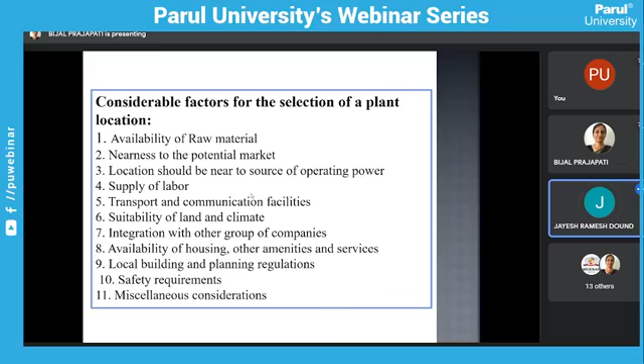Third, the location should be near to the source of operating power, supply of labor, transport and communication facilities, suitability of the land and climate, integration with the other group of companies, availability of housing and other amenities and services. These are the points which make the hierarchy for GMP for good pharmaceutical management as well as production planning. Okay. For the next slide, plant layout.

Once the decision about the location of the plant has been taken, the next important problem before the management is to plan the suitable layout for the plant. So plant layout is the method of allocating the machines and equipment, various production processes and other necessary services that are involved in the formation process of the product within the available space of the factory.

So production planning layout is mainly done in such a way that step by step we have to follow the individual steps. For example, starting from the raw material, the next step is receiving of the material, then sending of the material, then the warehouse. So these are layout diagrams in which a pictorial explanation can be given in an easy way. After receiving the raw material, it goes to the warehouse. From the warehouse, there are two components: the drug components and the packing materials.

Once the drug and packing material have been received, quality control inspections are done to decide whether the components and packing materials are to be rejected or kept. They are analyzed. After analysis, the rejects will be thrown out and the good ones will be kept. Weighing and dispensing will be the next step. After approval of the material, the manufacturing process will start.

Then in-process storage, and after in-process storage there will be quality inspections. After inspection, compliance will be given and the packing and labeling of the product will be done. So it indicates the path from the raw material at the starting source till the finished product, that is the packing. Once packing is completed, it goes to quarantine. Quarantine means a storage where the drug is kept in suitable environmental and climatic conditions. Then it has to be released based on the production storage, and afterwards is the shipment.

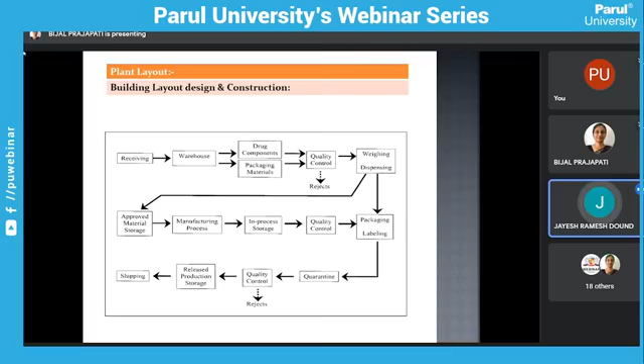Yes, this completed. Next slide. Now in this type, there are a number of facilities. So let me come to the point: what are the main equipment and facilities that are required for the plant layout?

Mainly we will explain the HVAC system. It is very important because it gives information for airflow distribution, control, filtration, air recirculation, and supply of sufficient airflow volume to support the cleanliness rating of the room, introducing air in a manner to prevent stagnant areas where particles could accumulate. As we know from a degree or postgraduate course, we learn about the different classes of HVAC systems.

This depends upon the different class of area. For dispensing and weighing, there is a 100 class where air can be circulated to prevent suffocation-like activity during dusting of raw materials. For this reason, HVAC systems suck the air and give pollution-free air for the labor or compounding system. These are the main things for the HVAC system.

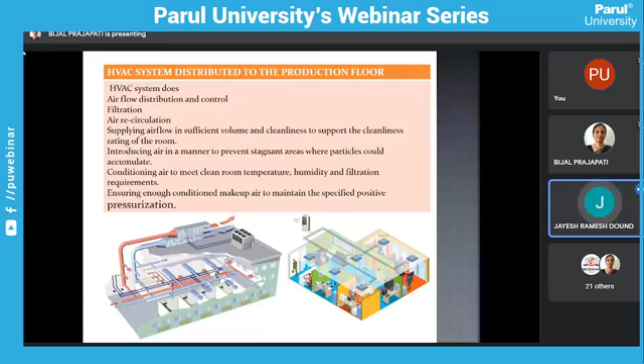Whatever the finished products are, they should be suitably designed and constructed to facilitate good sanitation. Now we will go to the next slide, which includes the ETP. ETP is nothing but the effluent treatment plant.

Whatever waste is generated from the initiation of raw materials and during manufacturing operations, the waste rejections are to be collected in a separate area where we can treat all this wastage to make a slurry sludge, and heat it at a high temperature of more than 800 degrees Celsius to convert the sludge digestion into powder. This helps prevent microbial or environmental contamination. For this reason, an ETP plant is a must and should be part of the plant layout.

ETP plants are used widely in the pharmaceutical industry to remove effluents from bulk drugs. During the manufacturing process of drugs, various effluents and contaminants are produced, so effluent treatment plants are used to remove high amounts of organics, debris, dirt, grit, pollution, toxic and non-toxic materials, polymers, etc. from the drugs and other medicated stuff.

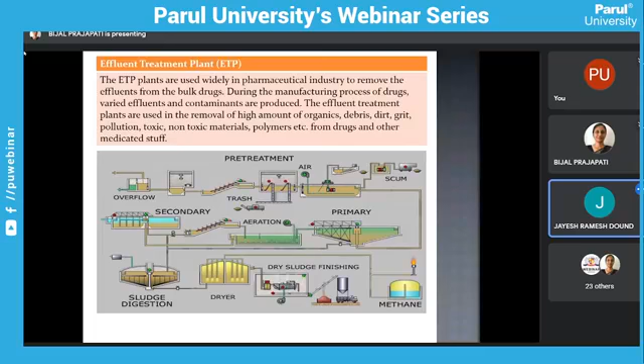So this is the ETP, which is the main source of plant layout. Now we will go to the departments in pharmaceutical industries. After having different types of layouts finalized, we will go section-wise through the pharmaceutical development industry to see what kinds of departments exist at different stages.

The first one is the central warehouse. In simple words, the central warehouse is nothing but a storage room. This is further divided into two types: raw material warehouse and finished goods warehouse. The raw material warehouse mainly includes active ingredients, that is the API, next the excipients, and third the packaging materials.

The next is the finished goods warehouse, which is generally nearer to the outlet of the company for easy and efficient transportation. Once the drug has been converted into dosage form, it is kept in the finished goods warehouse in a quarantine area, nearer to the outlet where dispatch of the material takes place.

Now we will go for the production department. In the production department, there will be a number of departments. First one, we will go for the liquid department. There are three types of liquid preparations: solution, suspension, and emulsion.

For solutions, the equipment mainly includes dispensing booth, preparation and manufacturing tank that is SS steam jacketed, storage tank, bottle washer, filter press, filling machine, capping of the bottle, and bottle labeler, that is automatic, semi-automatic or manual, and finally the carton machine for packing into drug products.

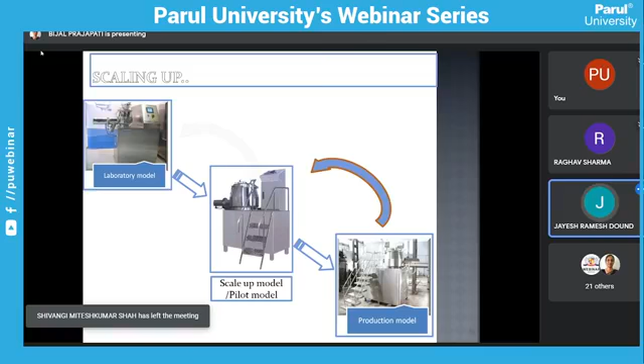So for that, we will go step by step. What is the pharmaceutical product development? First we will go for the design of experiment, that is the initiation of the project.

In that we can define the factors, that is CMA and CPP. CMA is nothing but the excipient, the raw material starting initial, that is the critical material attributes, and what will be impacted is the critical process parameter, that is CPP. So we will do a risk analysis of both, and on that we will select the proper experiment design which will affect the factors, that is the critical process parameter.

Now coming to the major responses, that is the CQA. I will explain the function of CMA, CPP and CQA. CMA is nothing but the critical material attributes, the starting material of the excipients which will impact my process, that is the procedure, and whatever the final products coming, that is the CQA, the critical quality attributes.

These are the factors to be considered during the initiation of product development, and the design of experiments to be run in experimental runs. Analysis factors include the response relationships. First will be the model graphs, in which we can apply numerical factors and graphical analysis.

Then we will decide the range, on what range the product should be coming. Range is nothing but giving a proper range which indicates that the process will be feasible, and it will indicate that critical capability factor.

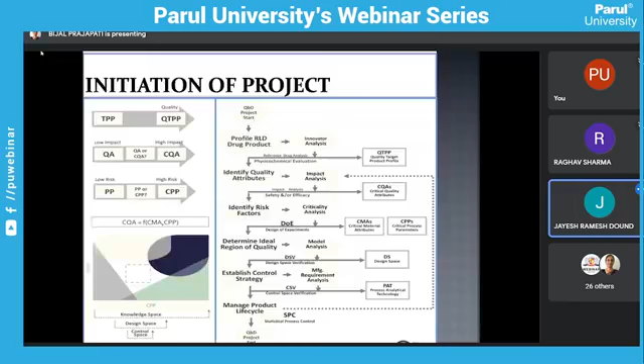Now, from a technology point of view, I would like to introduce the contents I am going to explain regarding the RMG, the rapid mixer granulator. Second will be the FBD, the fluidized bed dryer and processor. Multi-mill, Quadro Co-mill, roll compactor, blender, compression machine, and autocoater. These are the contents which will be highlighted, along with some parameters from the engineering point of view, on how the scale-up activity has been done prior to going for commercialization.

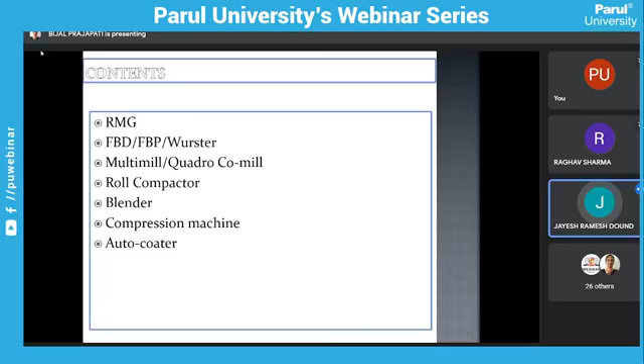So first we will go for the RMG, that is the high shear granulation. You can see the pictorial representation. On the left side in green is the CMA, and the right side is the CPP. So what will be the CMA?

That is the critical material attributes. So whatever the ingredients which are being used for the development of the product, that is diluent, okay, binder. So these are the intragranular material. So for that we have to decide what kind of binder concentration we are going to prepare. What is the granulation solution agent, that the concentration of solution to be added.

Second one is the API diluent ratio. How much concentration of the API that is present in the formula. And we should know what is the API PSD, particle size distribution. What is BD, that is the bulk density and tap density. So why we are highlighting the PSD, BD and TD? Because these are the three factors which will be useful for calculation of the RMG capacity.

Why are we highlighting capacity so much? Because once the capacity has been identified, we can manufacture the drug substances into the drug product. So why we are using binder concentration, granulating agent, API diluent ratio? These are the factors which will be impacting the critical process parameter.

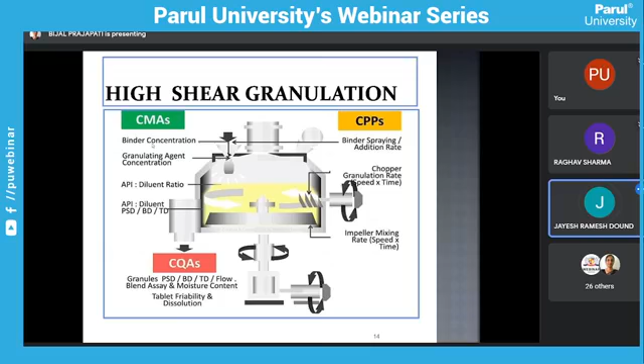Coming to the next slide, FBD, that is the fluid bed granulation. Here also I am highlighting the CMA, CPP and CQA. So fluidized bed granulation is the next step of RMG. Once the wet mass is developed in RMG, we will go for the drying. So drying includes how much air volume is required to fluidize the wet mass.

Okay, so as you can see, the API binder polymer concentrations. Now in fluidized bed granulation, there are two types of granulation that can be done. One is the drying of the wet mass and second one is the top spray. So I have highlighted the API binder polymer concentration in a top spray manner. If the concentration of API and binder polymer is high, the viscosity will be high and the wet mass will become overloaded. So the wet mass cannot be fluidized due to the choking of the dish mesh. So depending upon the CMA, this will impact my CPP.

That CPP is nothing but whatever temperature I require, that is the outlet temperature, inlet temperature, filter bag pore size. You may be unaware of filter bag pore size, because filter bags are the bags which are inverted on the upper side and which are shaken to release the materials and to prevent the clogging of the filter bag pores. So that's why we need to shake the filter bag during the operation.

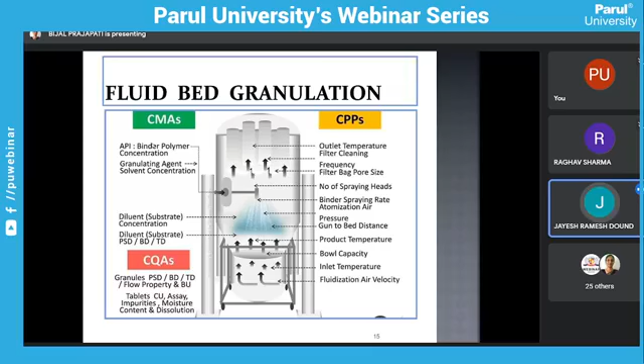So this is the engineering point of view where we have to work for fluidized bed granulation by doing the calculations. Okay. Coming to the next slide, the tableting process.

So the first one is the RMG, the second one is the fluidized bed, where wet mass is converted into granules. Once granule formation has been done, I have skipped one thing, that is blending. Blending has a CMA, and the CPP is the blending time and the RPM. I have skipped it, but the main thing is the tableting process, so I will explain the tableting process. The CMA and CPP are correlated.

The particle size which has to be controlled during fluidization in the FBD will have an impact on the tableting machines. So I will explain what CMAs are to be considered during tablet formulation using the machines. First, the particle and granule size, that is the distribution, shape, and size. Second one is the fines ratio. Once the tablet blend has been completed, a ratio has been finalized during scale-up development. Fines and oversized granules should be in a ratio of 60% fines to 40% granular material. Why has the ratio been decided as 60 to 40?

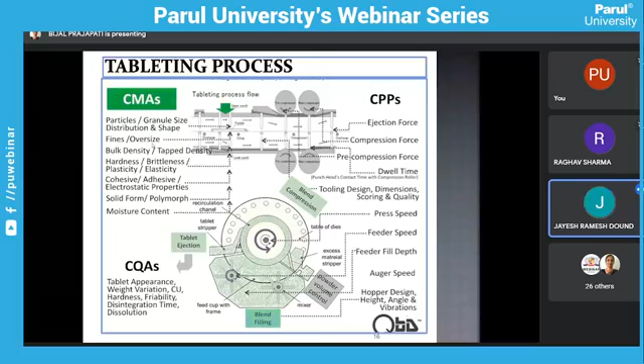We can say that we are used to the word rat holing formation. Technically rat hole formation is a very worst case because it will impact my CU, average weight, hardness, DT and all the things for the future purpose. For that reason, hopper design is also a part of the CPP. Okay, next one we will go for the encapsulation. Next slide.

Yes. For that also we have the CMAs and CPPs. So for the overall capsule formation, from a practical point of view, we can elaborate how the capsules are coming. They are getting separated; the cap and body have been separated. Once the capsules have been separated, they will come to the blend where slug formation will take place, depending upon the different tamping pins. So five types of pins will be there.

So one by one the slug will be formed in a different way, and once the weight has been selected, the slug will come into the capsule, and the next step will be the ejection, means closing of the caps and the body, and final will be of the faulty ones. So this is the encapsulation process. Now we will include the CMA. In the CMA, the shell material, empty caps and body dimension.

Yes, it is also a very important part because the dimension and the capsule body shape have to come in line with the channels. Once the channels are appropriate with the size and shape, there is a free flowing movement. If the dimension is different, there will be choking and it will impact the further process. Next one is the gelatin bloom strength. The capsule should have bloom strength, means what? It should have a suitable strength to withstand the ejection force or the vacuum which is used during the separation process.

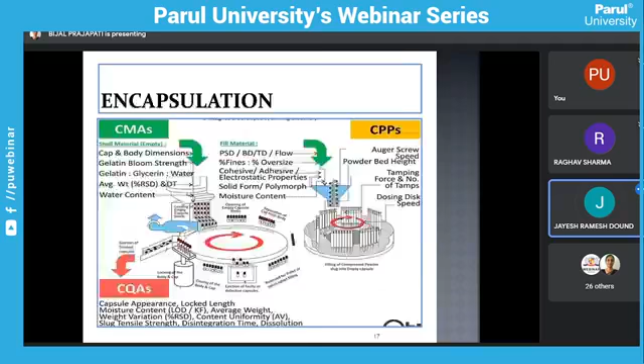Now we will go to the next slide, that is the roll compactor. So roll compactors: in R&D scale-up and commercial scale-up we use the roll compactor for drug substances which are very sensitive to moisture or to organic solvents. For those reasons, we avoid wet granulation or drying for that API, and go for the roll compactor, where the flow property can be enhanced by applying pressure to the API as well as the excipients to form proper granules.

For that, the CMA is the API-excipient ratio. For API and excipients, again the same things: PSD, BD, TD, flow properties, API particle size, and polymorphism. Why are we saying polymorphs? Because for most molecules, when they come under the compression force of the rollers, there might be a polymorphic change. So for that reason, we have to first go for the CMAs, and the last one is the dry binder and lubricant concentration. These are the CMAs which impact my CPPs.

So CPPs. I will explain what the roll compactor machine is and the machinery and terminologies. The first one is the agitator. The agitator speed is used for the movement of the material from one end to another. The second one is the feeder. Feeder means moving a particular volume of the blend forward. Proper feeding and proper agitation should be there, so they are proportionally constant, equivalent or proportional to each other.

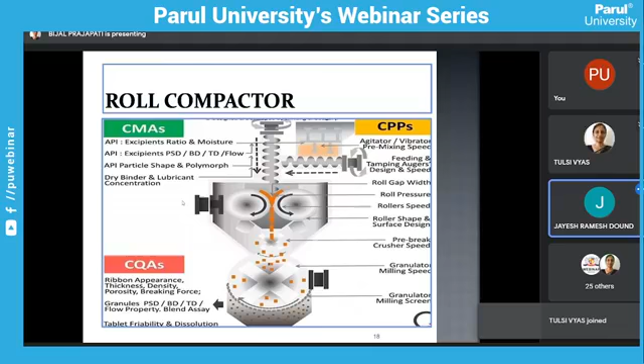Now we will go for the kinematic similarity. Two geometrically similar systems are called kinematically similar if they have the same ratio of velocity. Same velocity, that is kinematic similarity. Same geometrical shape, geometrical similarity. Now dynamic similarity: they are said to be dynamically similar when they have the same ratio of the forces. So geometric, kinematic for velocity, and dynamic for forces. These terminologies are very useful for the scale up basics for RMG, FBD, blender, and tableting force.

So why forces? We can correlate now. For dynamic forces, in the tableting process, compression force is there. Why velocity? In FBD, there is air velocity. The volume of air is required to fluidize the blend of higher weight mass. For that reason, kinematic similarity is required. Geometric similarity means same cylindrical shape, like the RMG. RMGs have different sizes, but the height to diameter of impeller and the diameter of the RMG will correlate. So that is why we need the scale up basics. Coming to the next slide.

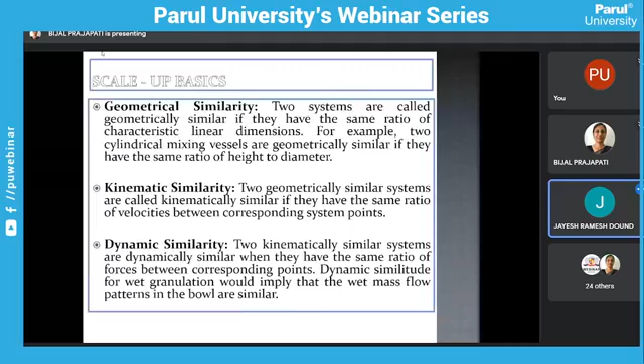So overall, what are the factors to be considered based on the occupancy of the equipment? We have RMG, mill, Comil, blender, fluidized bed dryer, compression machine, auto coater, and roll compactor. All this I have highlighted for the CPP and CMA. Before going for the selection of occupancy and equipment, we have to consider some factors. For RMG, we have to calculate the fill ratio, impeller tip speed, and Newton power number for the torque. I will explain one by one in the coming slides.

For the blender, Froude number, number of rotations, and headspace calculation. For fluidized bed dryer, base plate area ratio and occupancy. For compression machine, dwell time. For auto coater, brim volume for occupancy, pan load, and Froude number for the pan speed. And for roll compaction, roller gap and roller forces. These are the factors to be considered during selection of equipment for in-process as well as finished products. Coming to the next slide, RMG.

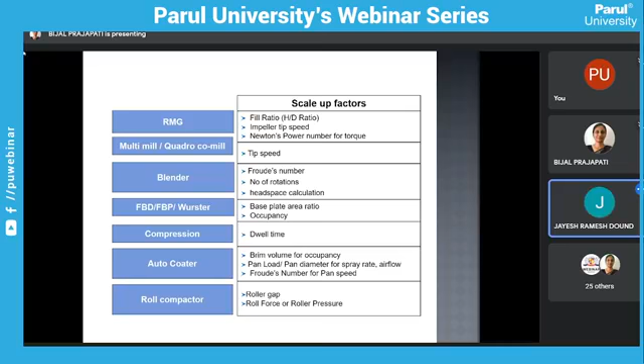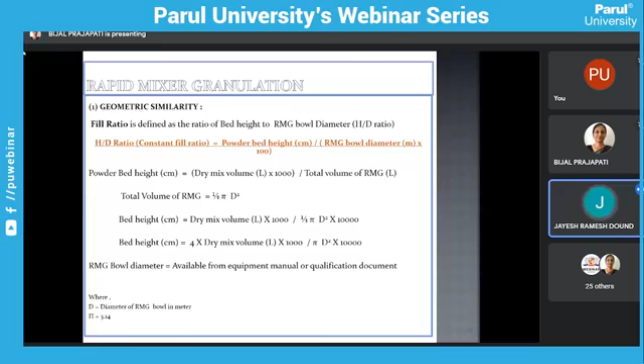I will just explain in short, because it will help you understand, but it will not be implemented from your side. Fill ratio is nothing but the ratio of the bed height to the RMG bowl diameter. The height and the bowl diameter give the fill ratio. We use this fill ratio to check the occupancy of the RMG, to have the capacity to withstand that blend. Coming to the next slide, we will go for the kinematic similarity.

RMG can be scaled down or scaled up according to the tip speed. Why is tip speed required? Because in R&D, small scale units are there: 5, 10, 20, 50 liter. But from a commercial point of view, there will be 100, 200, 400, 600, 1200, 1400. So to match the tip speed of R&D with the commercial, we have to calculate the tip speed.

So for tip speed, the formula is 2 pi R N divided by 60. R is the radius of the RMG impeller and N is the number of RPM of the impeller. So radius of the impeller and the number of RPM divided by 60 gives us the tip speed in meters per second. The tip speed represents the linear velocity at the tips of the impeller. Okay, coming to the next slide.

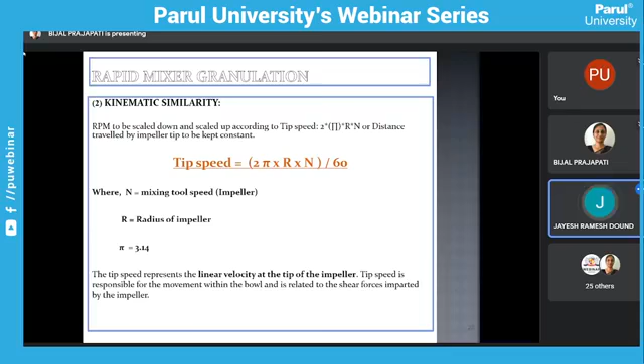So we will go for dynamic similarity, that is the force. Newton power number can be used to scale the torque. The formula for NEP is equal to P divided by density, R raised to 5, N raised to 3. P is the power consumption by the impeller blade. That is torque into 2 into pi into N. N is the number of impeller RPM, R is the impeller radius, and density is the wet mass density of the granules. This Newton power number relates to the drag force acting on a unit area of the impeller and the inertial stress.

So we will come to know what is the chopper when we use that terminology. Impeller and chopper are used for formation and breakdown of the lumps. Whatever drag force is acting on the impeller and the inertial stress will indicate the Newton's power number.

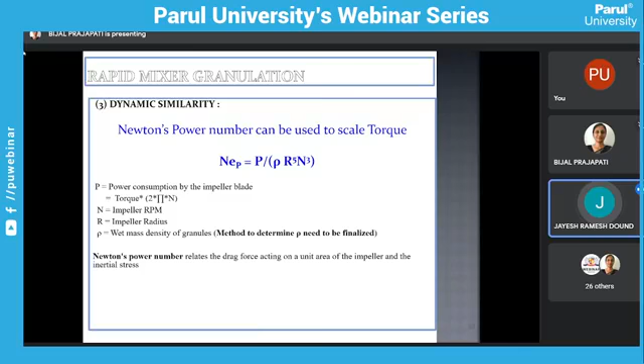Okay, coming to the next slide, RMG's relative swept volume. Relative swept volume is the volume of material that is to be swept per second per volume of the bowl, and the bowl is nothing but the RMG. This parameter is calculated as the volume swept by the blades per unit time versus the bowl capacity. It is related to the work or energy imparted on the wet mass during granulation. So impeller swept volume is the impeller height divided by bed height divided by 100, and we get the RSV volume.

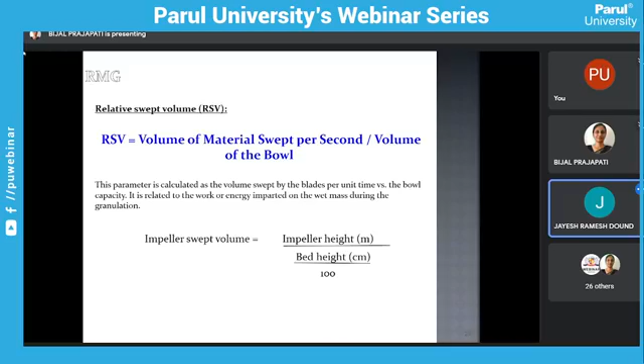So coming to the next slide, that is the fluidized drying, top spray and bottom spray drying process. On the next slide, FBP Wurster calculation will be there.

Yes, so if the fill ratio of the equipment remains same at all scales, then in any scale the air velocity should remain the same. Why are we talking about velocity and capacity, the blend? Because to withstand that blend weight mass, we require the velocity to fluidize the wet mass. For that reason, the air velocity in feet per minute is calculated. Its formula is air velocity equal to air flow, that is cubic foot per minute, divided by the base plate area.

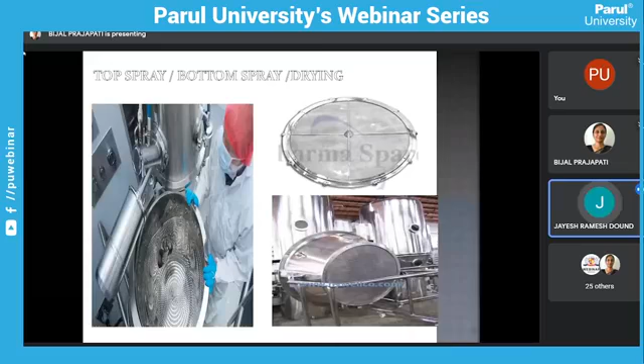For that reason, we calculate the base plate area. Next slide, ma'am. So in this area, we have given an example of what factor is to be calculated. In R&D, there are machines with a capacity of 125 cm square, meaning its capacity is 125 liter, and now we go to the commercial scale of 1300 liter. So whatever factors we use for air volume at scale A and scale B: spray rate for scale B is equal to Q1 into A2 divided by A1. Q1 is the spray rate of scale A in gram per minute batch. A2 is the base plate area of scale 2, and A1 is the base plate area at scale 1. So now we are talking about scale 1 and scale 2, just for your information.

When you come across these terminologies, you will use scale 1 and scale 2, meaning whatever factors we have to calculate from a commercial point of view, we will use scale 1 and scale 2.

For calculating the spray rate, from R&D to commercial, we use scale 1, scale 2, meaning we consider the base plate area of the commercial scale versus the R&D scale. Based on that factor, we calculate what factor is needed for going to commercialization on a higher level. This is only the basic information.

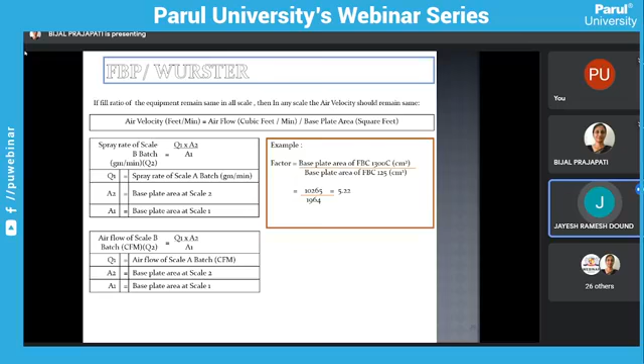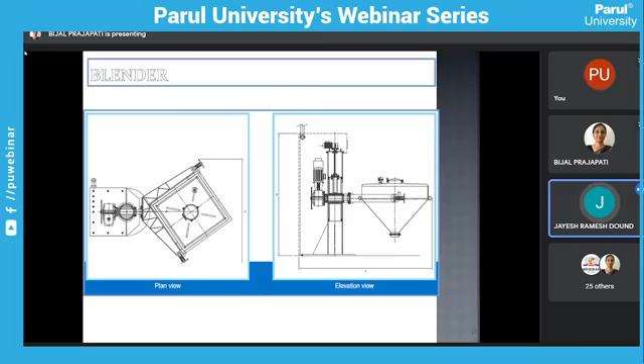So, blender mixing and PLB process. Blender is nothing but a process where the mixing of the blend is carried out. As we are familiar with the terminology, lubricants like glidants and anti-adherent materials are added at the last stage, and lubrication is done for proper flow and movement of the blend. For that reason, we use the blender.

While scaling up blending from R&D to commercial, we calculate certain factors. First is geometrical similarity, keeping the ratio of all lengths constant, that is the percent occupancy. Dynamic similarity is maintaining constant forces, that is the Froude number. We calculate the Froude number as omega squared into R divided by G, where omega is the rotational speed.

R is the IBC radius, that is the rotational length divided by 2, giving us the radius. G is the gravitational constant. This formula gives the Froude number. In R&D, whatever Froude number there is, we have to match that for the commercial scale up. For that reason we calculate the Froude number.

Here is an example, because in blending there are two main variables: mixing time and mixing RPM. Blending RPM is how much RPM is required to mix the blend for a particular time. So for these two variables, time and RPM, in R&D scale up the time is fixed. Commercially, we have to calculate the factor to replicate the tip speed as well as the number of revolutions for the commercial level.

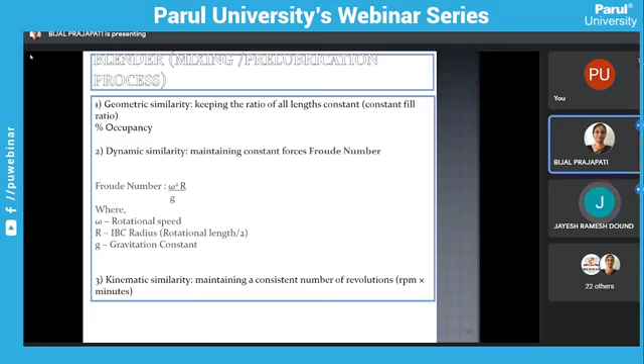Hello. Hello. Yes, yes, Mr. Jayesh, sorry. Yeah, coming to the next slide, ma'am. Just a minute, yes, maybe. Okay, thank you. Is it okay? Yes, yes, okay, so yes, just let me complete this activity.

So the first slide has an example for lubrication. You can get these examples and calculate how the number of revolutions can be calculated from the small scale to a higher scale, and what time is required to be calculated from R&D to the commercial point of view.

Now we will go for compressions. In this, there are two variables shown in the pictorial representation, that is the PCD, the pitch circle diameter. This pitch circle diameter is used to calculate the dwell time.

Dwell time is nothing but the time required for tablet formation when upper punch and lower punch come in contact with each other. Different types of punches are there, D type and B type. D type having the head flat is 15.875 mm, that is 0.625 inches, and the B type punch head flat will be 9.525 mm, that is 0.375 inches.

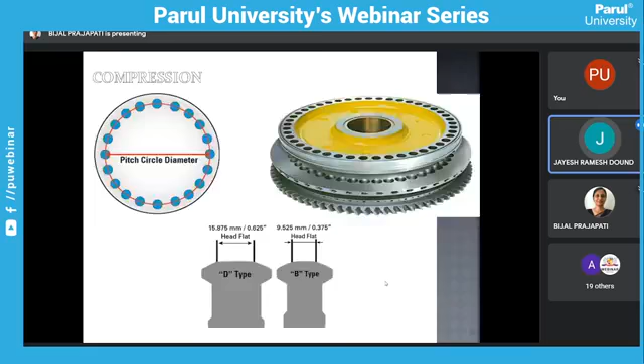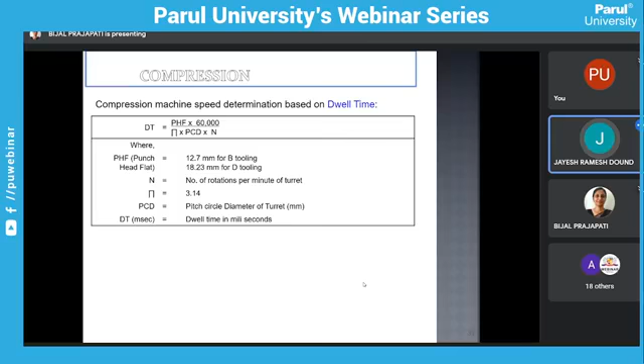Coming to the next slide. Compression machine speed determination is based on the dwell time, as I have explained. So the dwell time formula is PHF, that is the punch head flat, into 60,000, divided by pi into PCD into n number of rotations. This is the formula used to calculate the dwell time from small scale equipment to higher scale equipment. The example is given in the next slide.

In R&D small scale, the CTX 28 machine is there, 51 station. So from small scale, how to calculate the higher rate? Based on these factors, we can calculate what RPM is required to match the speed of the higher machines. These are the basic examples given.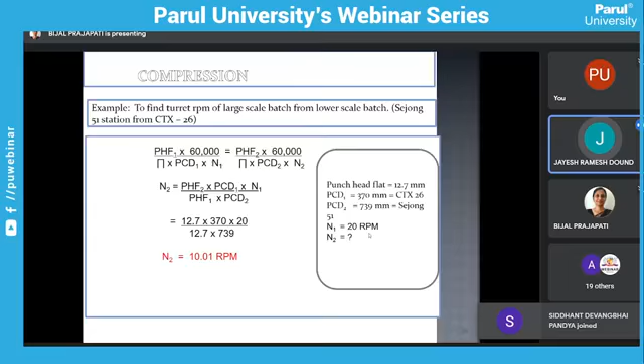Now we will go to the next slide, that is the determination of the fill depth. Fill depth is nothing but how much powder blend is filled in a die cavity. It depends upon the size of the cam. By maintaining the fill depth, we can achieve the desired tablet weight, thickness and hardness in any scale.

So the fill depth formula is 4m divided by pi into d square into rho. The tablet diameter, that is the length, and density of the mass are used for the formula. Now the last stage is the coating.

Next slide. While selection of coating machines, we have to consider the brim volume. Brim volume is nothing but the total volume of water when the pan is fully filled in its current position.

As we know, Accela Cota, normal Cota pan is there. From an academic point of view, we are very used to the Accela Cota, and there are a number of coating pans. But for commercial purposes in industry, there are different pans, different mix pans. We can see the palm pan, Glatt pan, with different capacities: 36 inch, 15 inch, 26 inch, 24 inch, 60 inch, 66 inch. Depending upon the different size and capacity of the coating pan, we have to calculate the brim volume.

Brim volume is nothing but the volume of the cylindrical part plus the volume of the conical part. For example, the brim volume of a 60 inch Gansons coating pan has a capacity of 497.8 liters, and the BD of the tablet is 0.67 gram per ml for 100% occupancy.

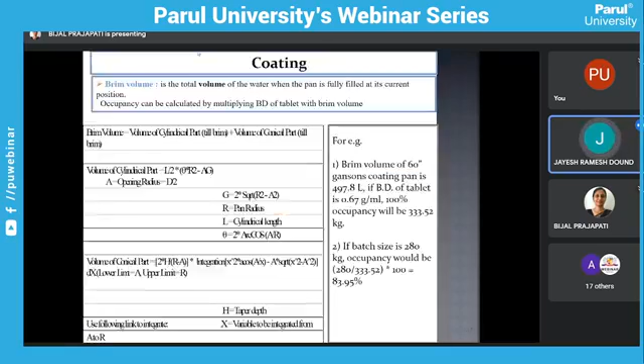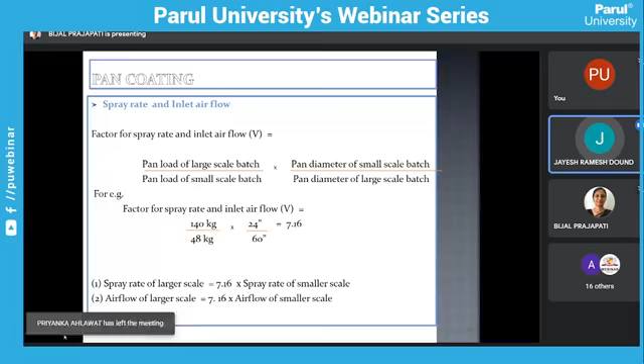The formula is the pan load of the large scale batch divided by the pan load of the small scale batch, into the pan diameter of the small scale batch divided by the pan diameter of the large scale batch. These factors come when you get used to factorial designs. Next, the same type of example is given for pan speed, how to calculate the pan speed. Next slide: roll compaction. Next slide.

So in roll compaction, we have to calculate for roller gap and roller diameters. For example, if roller hydraulic pressure is used, the conversion factor between the roller hydraulic pressure bar to roller force kN is to be applied. So there are two types of machines. From a commercial point of view, WP 120 means the capacity of 120 kg, and WP 200 indicates the 200 kg capacity.

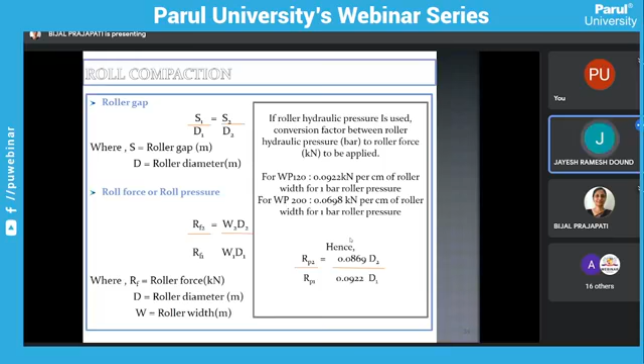For WP 120, the kilonewton per bar is 0.092. For WP 200, 0.0698. So while calculating, we will get the roller force or roller pressure. Okay. So this is only a slight representation.

So the last one is a keynote. A smart man makes a mistake, learns from it, and never makes that mistake again. But a wise man finds a smart man and learns from him how to avoid the mistake altogether.

So these are all the representations regarding the scale-up factor calculation based on the occupancy as well as the engineering point of view, and what factors have to be considered while calculating the batch size in technology. So overall, I have combined both pharmaceutical production management and the technology which is used commercially. So this is the brief introduction and the slides we have presented. Any questions regarding them? Feel free to ask.

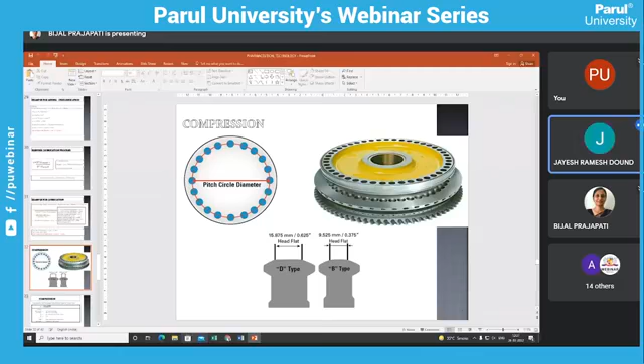Hello. Yes, any questions? Actually, I will just interrupt you, ma'am. Sorry for that. The students who are unfamiliar with this process, I accept, I agree. But this is the current scenario, because you are the new aspirants who are going to be introduced to this technology, and we will definitely help with that. For that reason I have given you the details about the factors, what has to be calculated and considered during the scale-up of R&D projects, and going from R&D projects to commercialization at larger volume. That's why I have taken selective points to calculate the factors.

Just to have a brief idea, you can mail me or ask me regarding all the things. So this is only the brief introduction. Detailing is not there. You will come to know when you are used to the terminologies. You may get a little diverted by the topic, but it's very useful in day-to-day life. You will implement these factors, so it will be really helpful for all of you. So that is my only concern. Sorry, the terms will be a little different for you, but it's the reality for the coming scenario. Okay, ma'am.